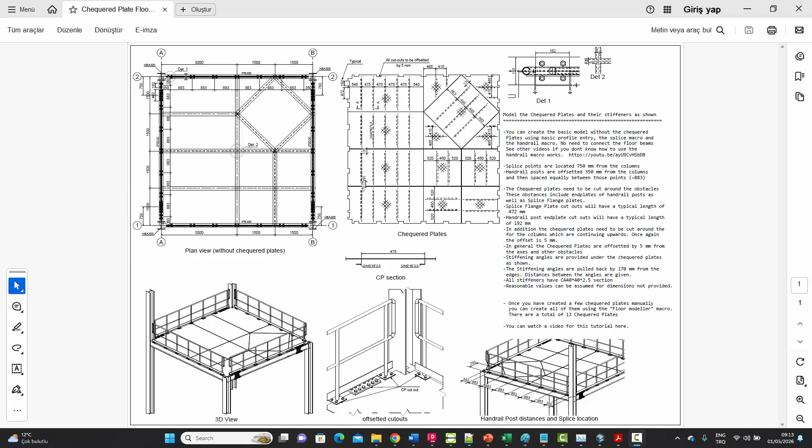So this is the assignment which we will be attempting now. It's basically very small, just 4 columns, a few beams, some handrails around them, and some splice points as well. If I zoom in over there, you can see that there are handrails, and the handrail posts are connected to the floor beams like that.

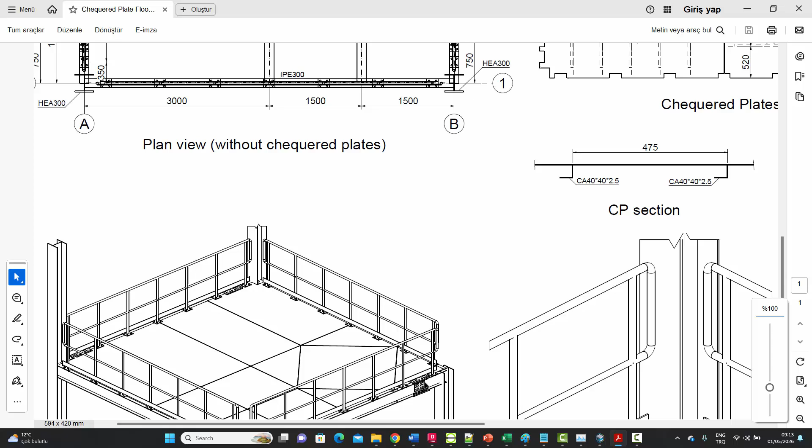And then there are some splice points. So you've got splice points over here in the beams, and over here and over here. So basically on these 2 beams only. The other 2 beams don't have splices. And the assignment is basically about creating these checkered plates in these areas over here, which the floor would need.

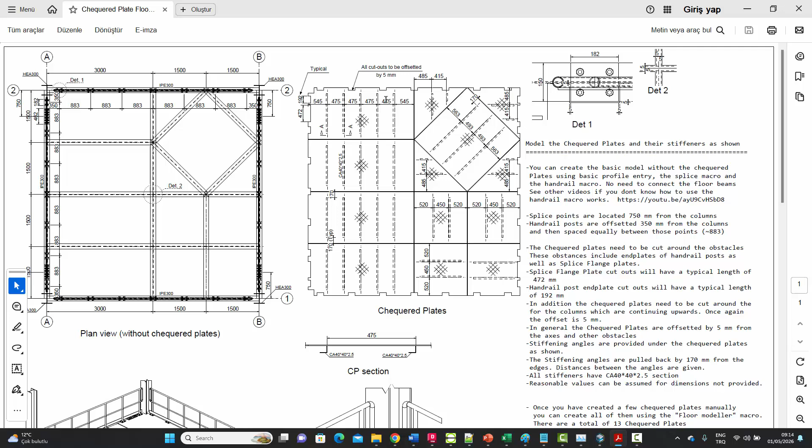So there'll be 13 checkered plates created along with their stiffeners. The checkered plates are very thin, as you know, so they usually need stiffening under them. These stiffeners are given as angles, CA 40 by 40 by 2.5, and we can zoom in over here to see how the angles are welded under the checkered plate at certain distances. Those distances are given over here for each individual.

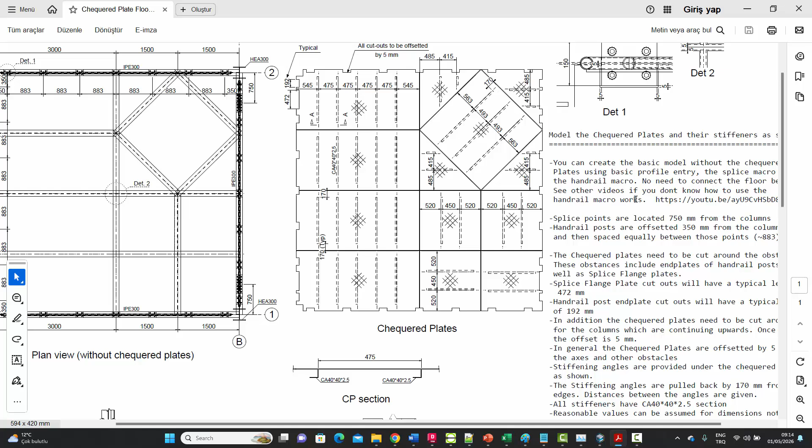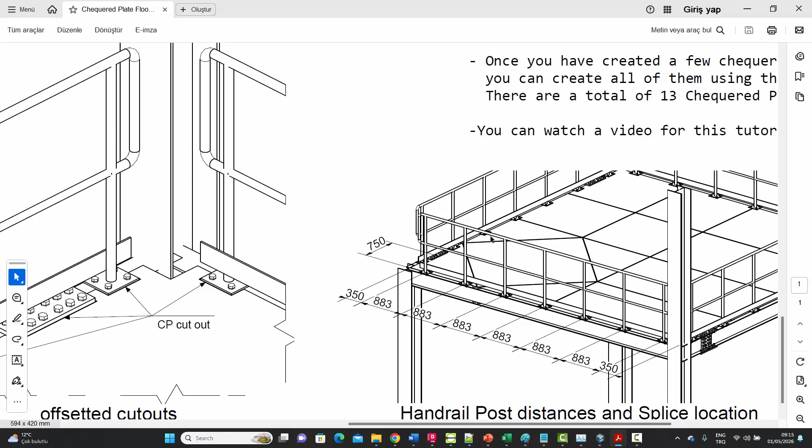Full dimensioning of the checkered plate is not given, but we can see from the notes that the splice points are located 750 millimeters from the columns. The middle of the splice point is 750, and the first and last posts of the handrail are 350 millimeters from the columns, and then they're equally divided into 5 more posts in the middle. So that's the dimensioning of the posts.

The checkered plates need to be cut around the obstacles. These obstacles include end plates of the handrail posts as well as the splice flange plates. As you can see over here, the individual checkered plates have been cut out. This long cut is around the splice, and these shorter cuts are around the handrail posts wherever they come. The tolerance is about 5 millimeters. You need to clear the obstacle by 5 millimeters and go around it.

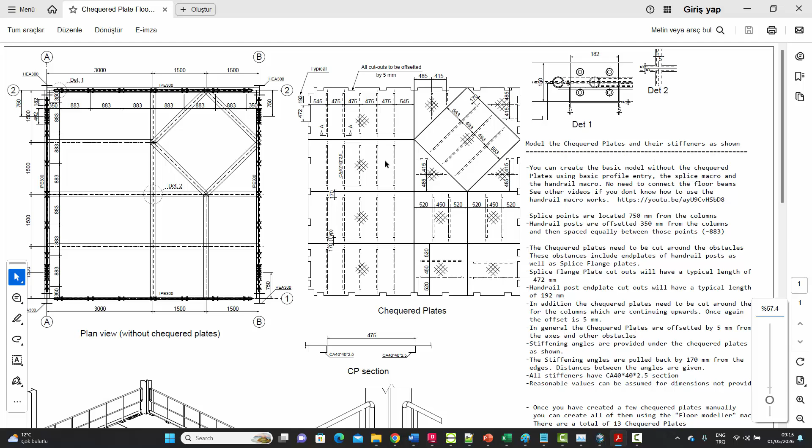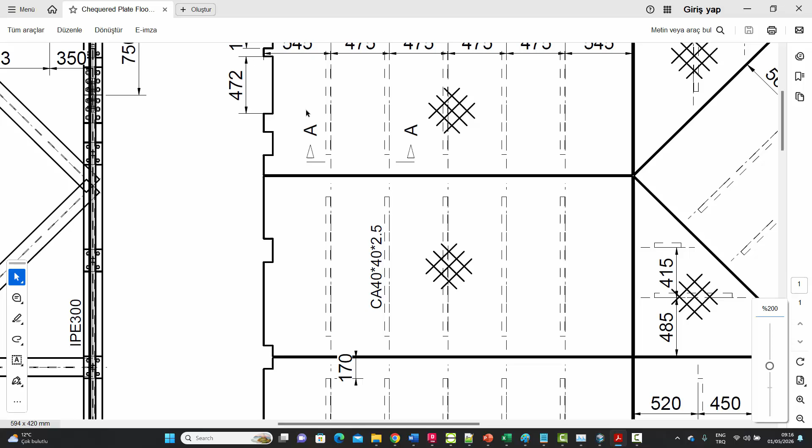They're also cut around the 4 columns. If you notice from the 3D view, these 2 columns end at the floor level, whereas these 2 columns at the back continue for whatever reason. That creates a difference because the checkered plate over here needs to be cut around the column, here and over here. But on the other side, because the columns are not continuing, the checkered plate is just capping the column over here and over here.

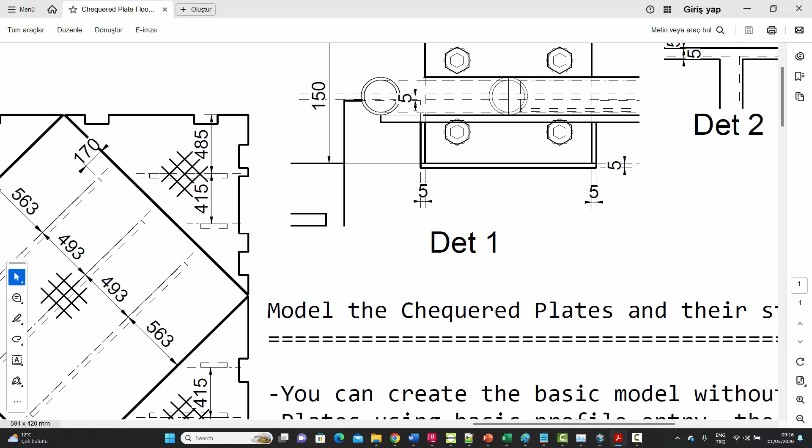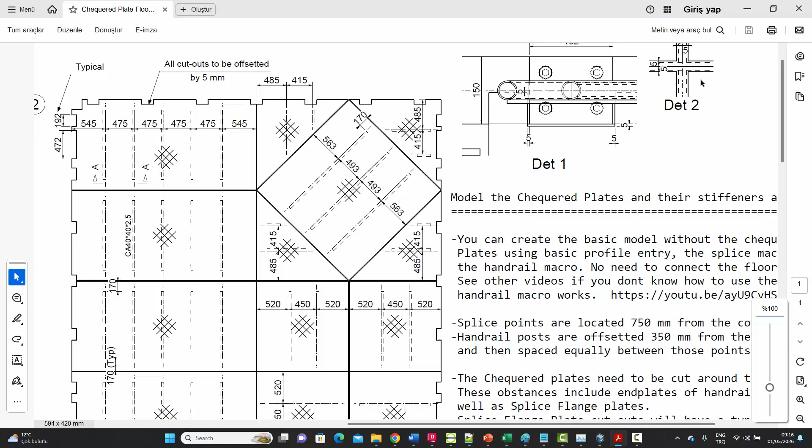If you zoom in over here, we see the 5 millimeter offsets given. These cutouts need to be offset by 5 millimeters. And in areas where the checkered plates are only sitting on top of the beams, they have to be separated from each other as well, like this point and this point. That is also given as detail 2, that the checkered plates are offset 5 millimeters from the axis of the beam, so you have enough space to weld them to the top of the beam.

That's basically the assignment: to create the checkered plates with their stiffeners. But to do this, first you will need to create the columns, the beams, and the handrails in just a few minutes. We won't be explaining the handrail macro here, but we'll quickly use it to create these 4 handrails. Then we'll use the splice macro to create these 4 splices. And then the assignment will be about how to create these checkered plates.

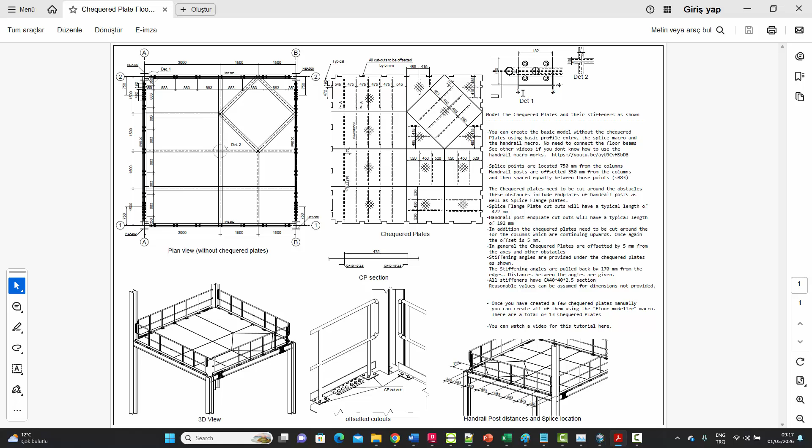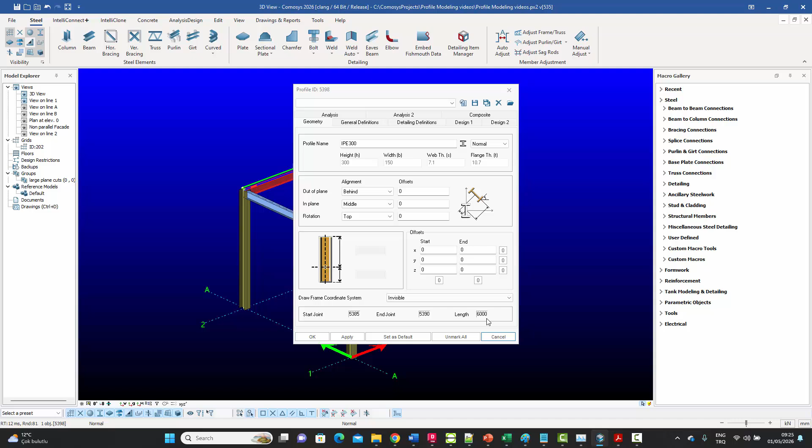So let's begin by entering the structure very quickly. We just need 4 columns in the corners, like that, and right click to finish. We need the beams. The beams can be IPE 300. The columns were HEA 300. Let's just see what the profiles are. So IPE 300, that's fine. These ones are HEA 300.

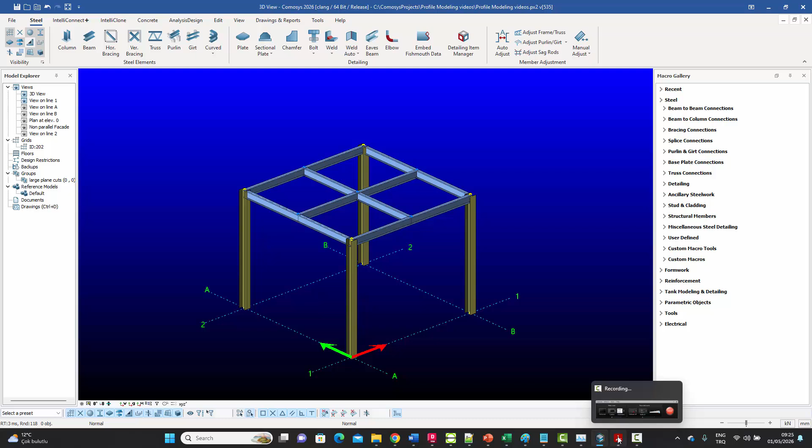Let's go back to the drawing to quickly see. There's a beam in the middle. The middle one is continuous. So along the X direction, this one is continuous, and this one breaks into two. So we go back and create a beam from here to here, then from here to here, and from here to here, and then there's another beam from here to here, and from there to there.

So we just do like that, and there's another one like that. Let's go back to the drawing. This one going over here like that, and then they're basically at 45-degree angles, like that and like that. So that basically finishes off the floor beams for us, and now we can quickly create the splice points and the handrails around it.

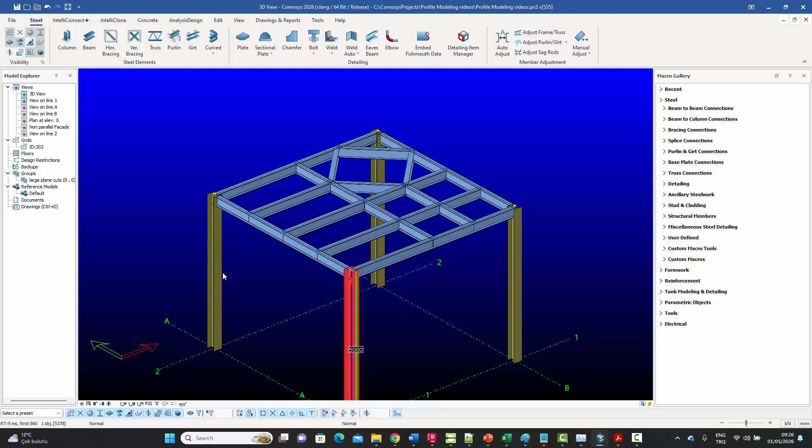But before we do that, let's just extend these columns as well, because these two columns were going to be, just make them 7 meters if you want. The other ones were 5 meters. So yeah, this is what it's supposed to look like.

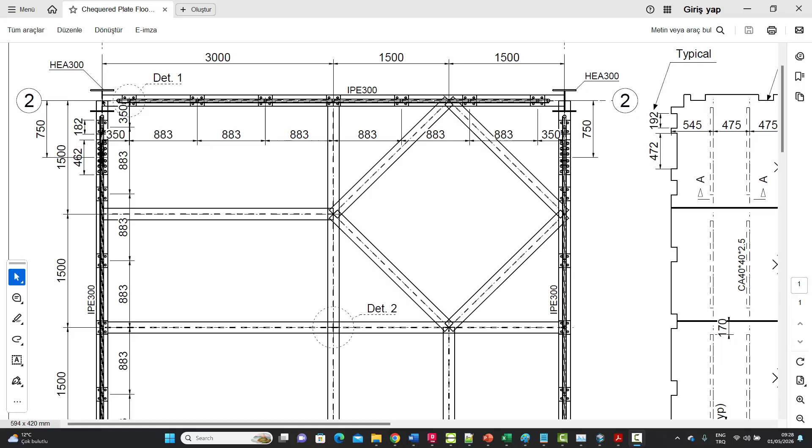So now we see that the splice points on these IPE 300 beams on the left and right are given as at a distance of 750 millimeters from the center of the column. So what we can do is we can select this, go right click and say break frame, and we can hover over this point and say dy minus 750, like that, so that we have a broken frame over there. Then we can select this part and hover over this point now and say dy 750, like that. So we have the two beams broken.

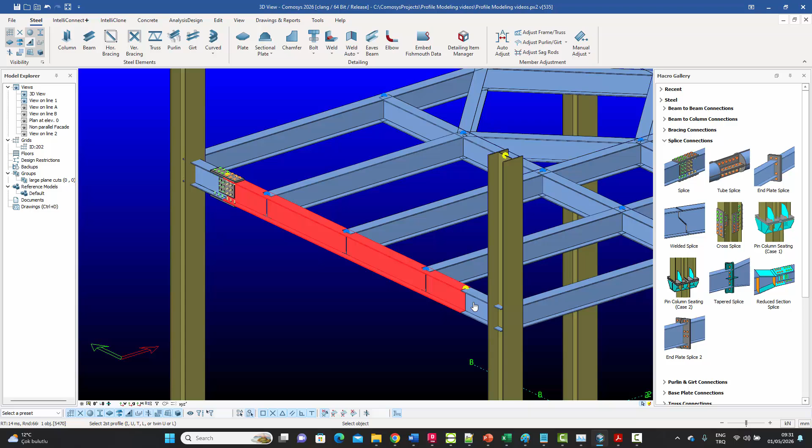We can do the same for this one, hover over this point, say dy 750, and hover over this point and say dy minus 750, like that, so that we have the 4 splice points ready. Now that we have the splice points ready, we can just go to the splice connections over here and very quickly just make those splice connections like that. This is all just preparatory work for the main assignment. So we've got the splices ready now, and now we can move on to quickly create the handrails.

Now, under the ancillary steelwork, we have the handrail macro over here. So let's first quickly use it to create the handrails on all 4 sides, and then we'll modify them according to our requirements. So select that. To make this one, since there are 3 beams over here, because of the splices, we'll select this beam, and then we'll select the middle beam, and we'll select the last part as well. Then we'll right click, and then we'll basically select the start point and make sure the red snap is lighting up so that you have the correct points.

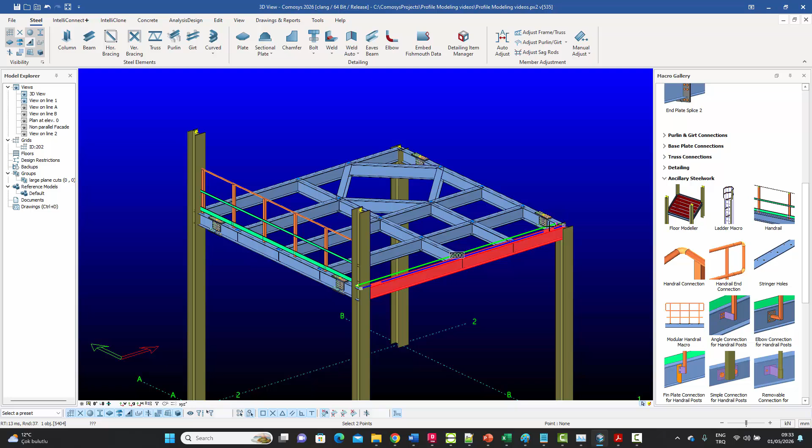Then for this one, you just select this one. There's only 1 beam, right click, make sure the red one is lighting up, make sure the red one is lighting up on the other direction as well. For this one, you will need to select all 3 like that, right click, select that point, and for the last one, once again, right click, make sure you have the red thing snapping like that, and you have the handrails entered.

Now let's just modify one of these. So we select any member of this handrail, press M to select the macro, and press enter to open up the thing. We have this requirement of the first post and the last post as 350. So I'll just enter those. This interpost distance, this is a guideline distance because it's going to try to equally divide. So if I put 1000 over there, it's just going to try to equally divide, and obviously it will be slightly less than 1000. It's probably going to be the same as the other example. This one, it's not really part of the assignment, but to just pull it back a little so that it doesn't hit the column, make it 140.

For the post settings, we'll use the pipe, and we'll bring it to the middle so that it's sitting on top of the beam. That will be one change. For the end plate, because there's going to be an end plate connection at the end of them, I'm just giving these numbers because they're the same as the other example, so that you have the same model. So we have that, and we want the end rail to be, we want these elbows and everything. So we turn on these.

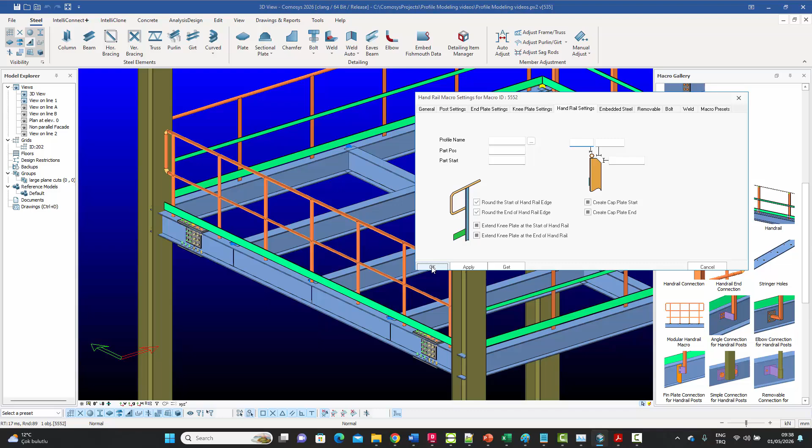This is not a video about how to use the handrail macro. You can see another video on that, but basically just to create something similar. So these settings, the post in the middle, the pipe, the end plate dimensions, and the handrail. So that should basically do it. Let's see. Yeah, so that's basically the kind of handrail I want over there. It's sitting on the middle of the beam. It's spaced by around 883, I think, right now. You can probably see that now.

If you measure the distance from here to here, it's roughly about 800. I'm not snapping to the right point, but it should be the same. Now, once I have that, I can turn on my macro symbols over here. This is my macro which I've modified.

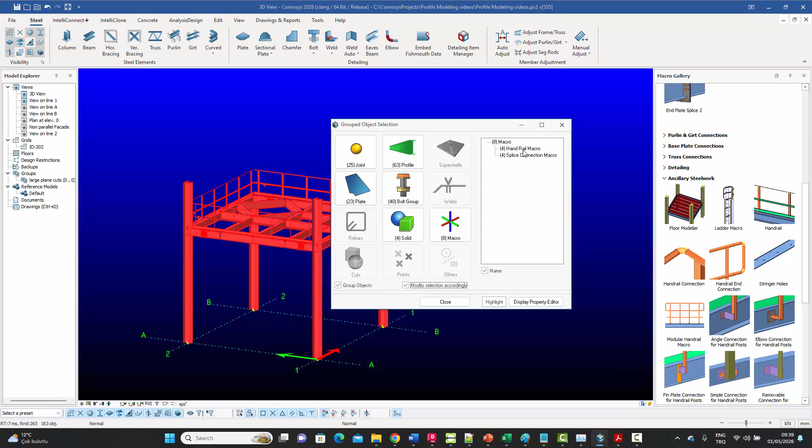What I can do is I can just select like that and go to my macros, and it tells me that you've got 4 handrail macros and 4 splice connections. I want to modify the handrail macros, so I select those 4. Let's turn this off and right click and say match elements to this one, which I just modified, and all the other macros will now be modified accordingly. So I basically just set up the structure the way it was meant to be in the example, and the assignment will start from this point.

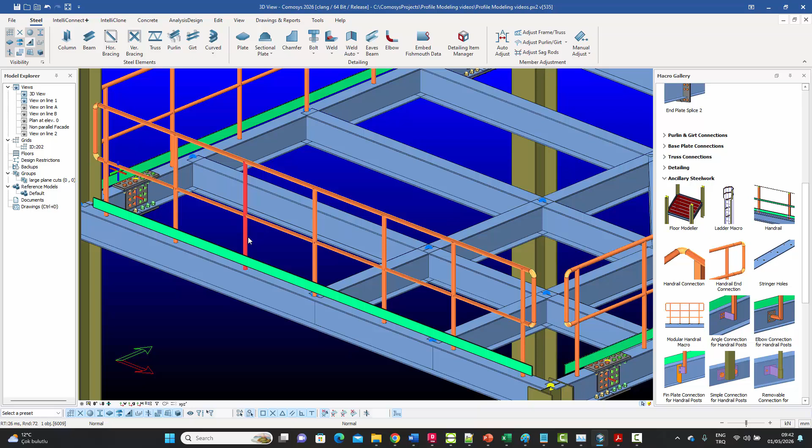Okay, so there's one thing which I forgot to do, and that is I didn't create the end plate connection for the post. So I can just select the post again, press M and enter. And if I go to my post settings, the default is to connect directly welded, and I don't want that. So I'll turn it off. When you turn it off, it goes to the other options. So there you go. Once I turn that off, the actual end plates are also created.

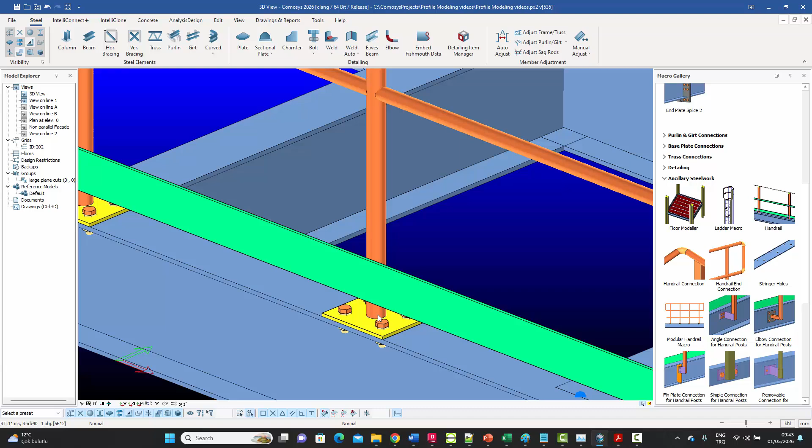And once again, I can select the whole thing, go to macros, select the handrail macros, and make them all match this one. So we have the end plates on all sides.

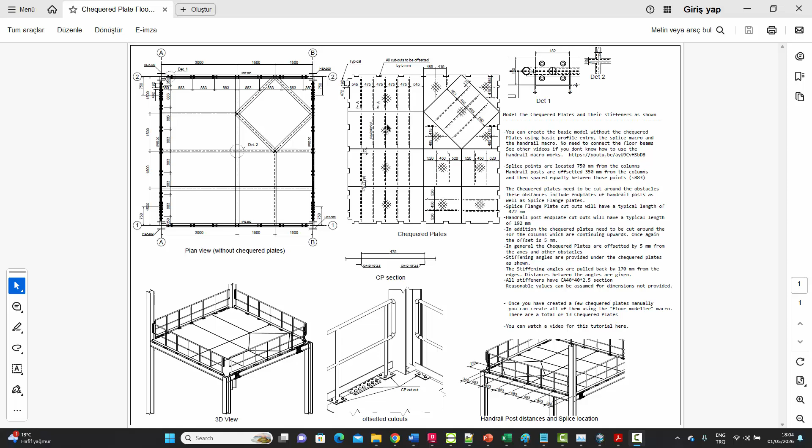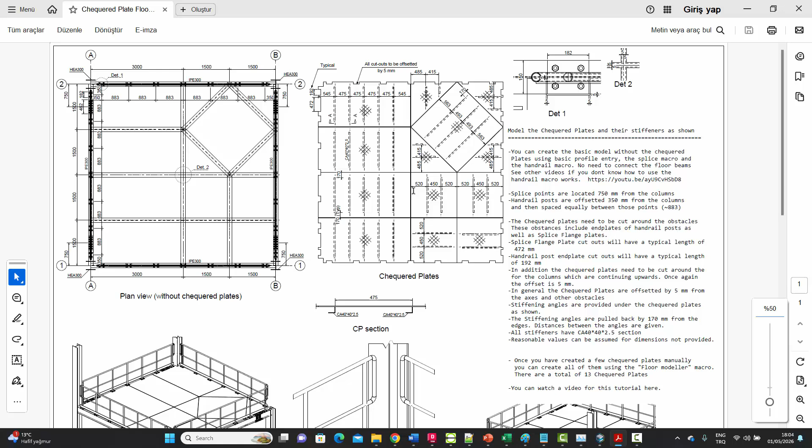Now, the reason why this topic is important is because chequered plates, as you can see over here, if I were to zoom in, are quite involved. All these cutouts will require you to create dozens of points and all the offsetting by 5 millimeters or some number. This would make it really time consuming for the user. And so we need a way to create them with a lot of ease.

So you can see from this picture that it's not easy to make. It's easy as far as the basic process is concerned, but it's time consuming. So let's go back to the model and we'll discuss. There's a concept in Comosys which is called floors. You see on the left hand side, it's called floors, and this is used primarily for entering loads in the building. So what the floor will do is it will automatically find.

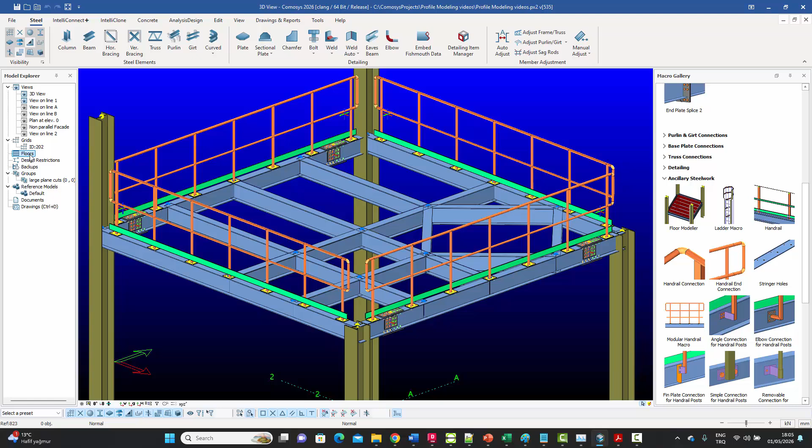So let me go back to the drawing. If you remember, there were 13 checkered plates. There was this one, this one, 1, 2, 3, 4, 5, 6, 7, 8, 9, 10, 11, 12, 13. And if you notice, all of them are the areas between the beams, right? Let's go to the model.

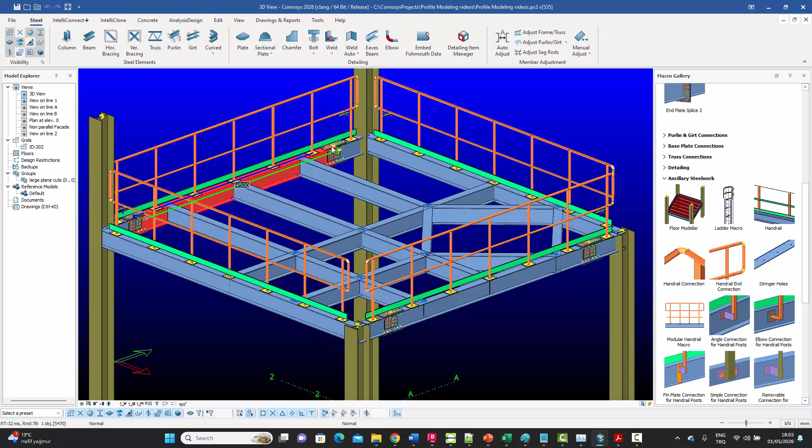See, this one lies between this beam and that beam and that beam, because they have a splice point over there, and that one. So 1, 2, 3, 4, 5 beams provide the circumference for this checkered plate. Similarly, for this one, it's the one I've selected, this one and this one. These 3 provide the circumference for that checkered plate. Basically, the beams and the connectivity between the beams will provide information on that.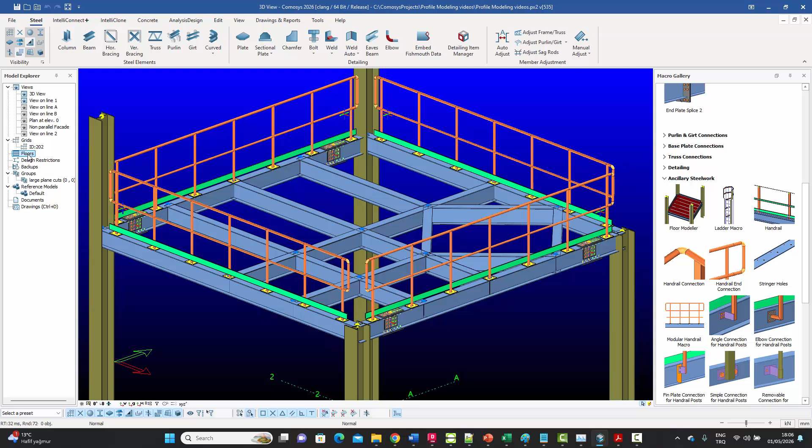And the same connectivity is used for applying loads to the floor. For that we have this concept of floors in COMOSYS. But we use the same concept to create the checkered plates as well, or the gratings for that matter. So how does it work?

You come to the floors, right click and say create floor. When you do that, it asks for a name, and since this is level 5000, you can give it a name of plus 5000 level, any name. Basically, this is just a name. Once you do that, under the floor you get this new floor. Right now, there's nothing in it.

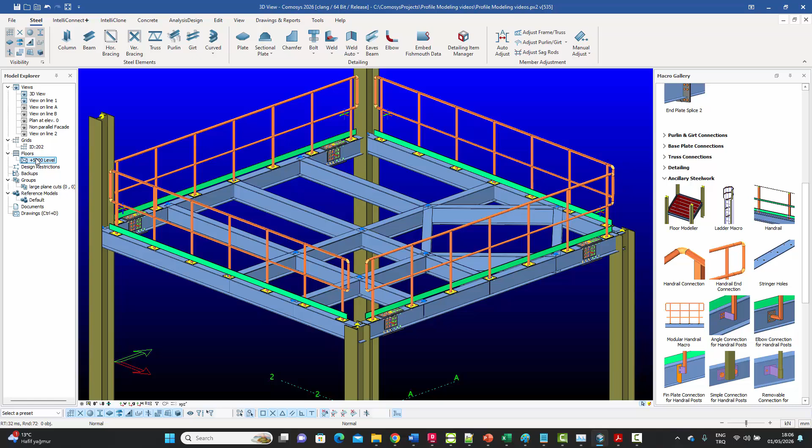It's just a name. What you can do is select it, right click and say find polygons. What that means is it will look at some level, which it's going to ask for in a second, and it's going to try and find all these 13 areas where theoretically loads can be applied on the structure. But we'll use the same concept for checkered plates as well. So it says you want to find the polygons of plus 5000 level.

This name doesn't mean anything, it could be any name. When I say yes, it's going to ask for a Z level. Since we're working in this view, this Z level will be in reference to the coordinate system of that view. Since that view is at the 0 level, I'm going to say 5000 from that level.

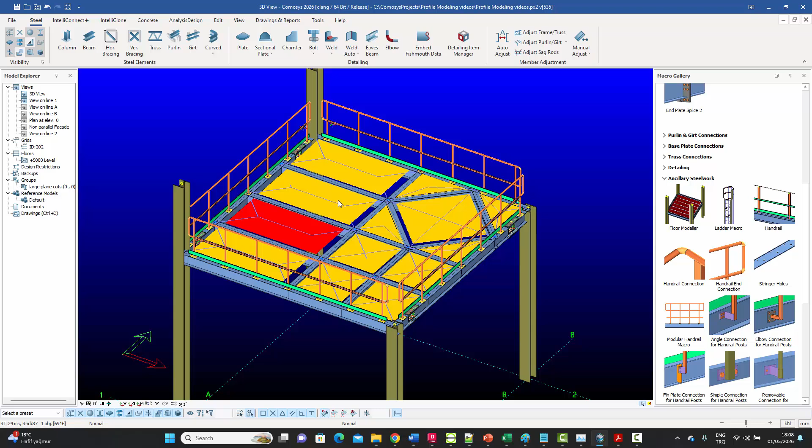When I do that, you see immediately it creates certain polygons. These are not checkered plates, these are just polygons which you can now use because COMOSYS is also a software for doing analysis and design. I can actually create load cases and use these polygons to create loads on beams, like this one can create loads on this beam, this beam, and so on, basically the ones surrounding this polygon. So the primary purpose of these yellow or orangish polygons is to create loads.

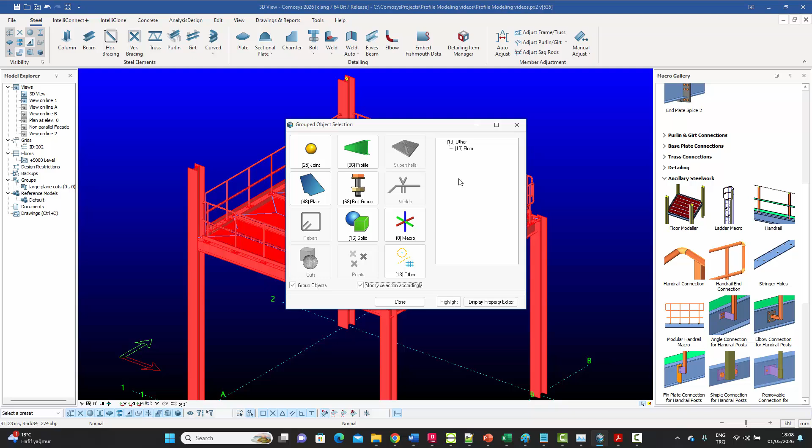But we can also use them to create checkered plates. How you do that is you just select the whole thing, or basically you only need to select the polygons. If you come over here under the other section, you will see floor, and when I do that, only those polygons will be selected. If you notice, their count is 13.

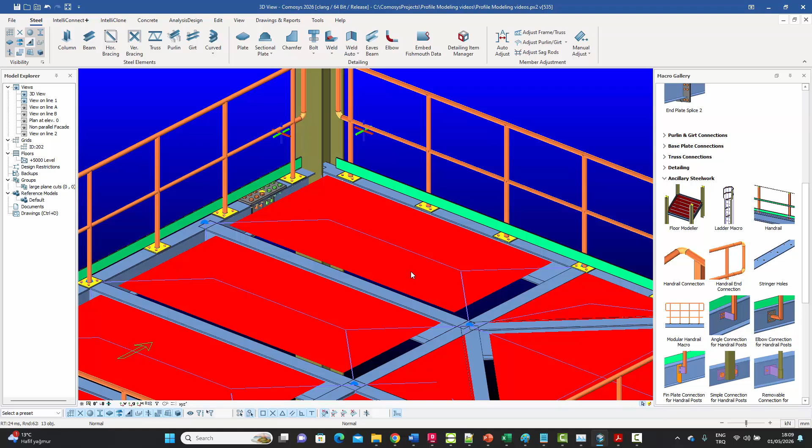They're basically the same shapes as the checkered plates, the only difference being they do not have any of the cutouts. They just have information about the beam connectivity, how the beams are connected around those, but they have no information about the plates, the splice plates, the post end connections and all that.

But when I select these polygons and come to the ancillary steelwork on the right hand side, once the polygons are selected, all I need to do is just click on it. There are certain defaults - if you want, you can first click shift and open it to make some changes to the settings, or you can just click on it with the default settings. I'm going to just click on it now, like that.

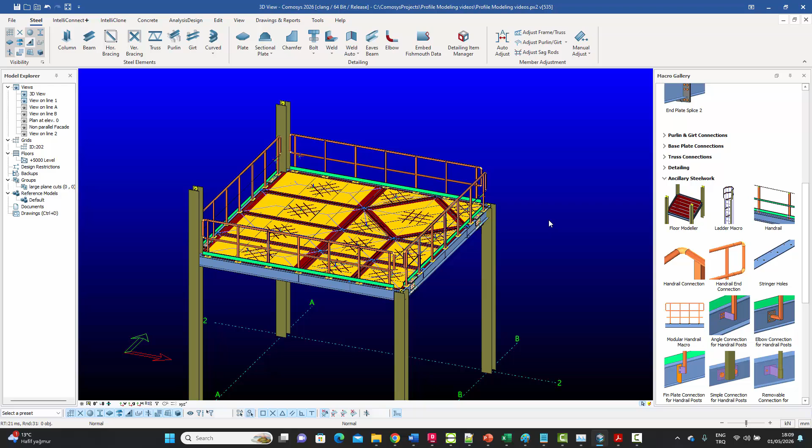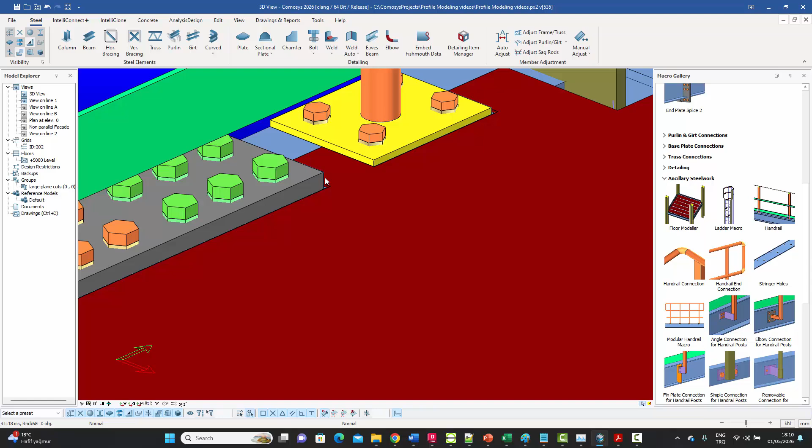And when I click on it, you see that it has done something - it has actually created my checkered plates. You can see they have been cut out with certain offsets around those obstacles, around the flange plates of the splice connection, once again around that. And there are 13 of those.

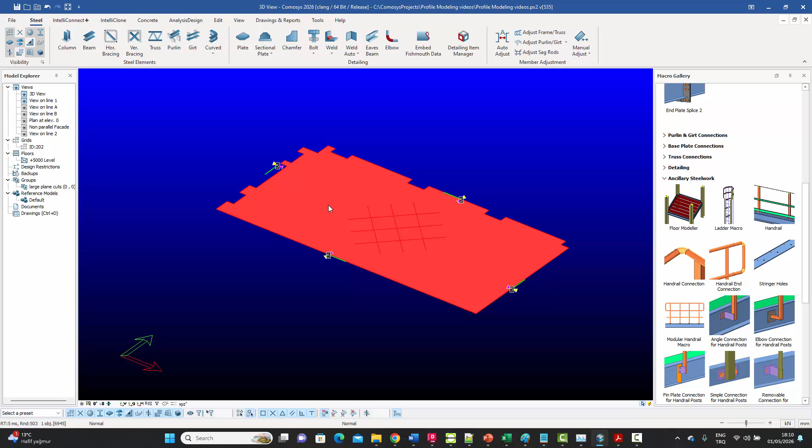Just to make it clear, let me turn off the visibility of the polygons now because their work is done. So let me go in there and turn off the visibility of the polygons like that, so I can see them clearly. If you notice, basically this assignment is over. Every one of those checkered plates is now ready, and we can actually just do numbering and create the drawings if you wanted to.

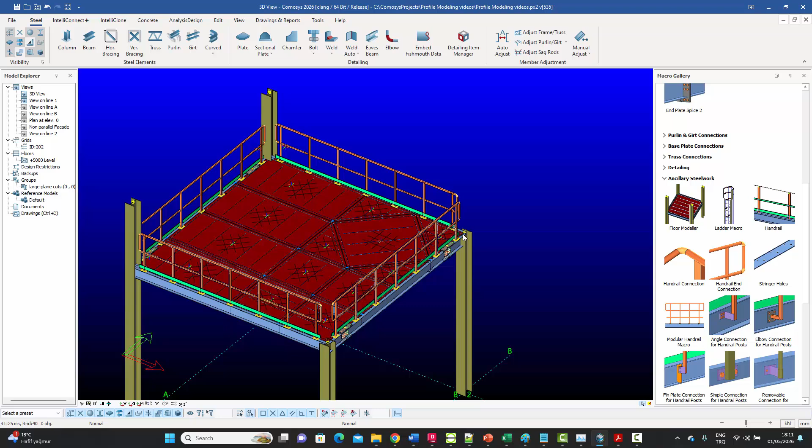Let's look at this one - show only. You can see this, and you can also see that it has cut out around the column as well, and it has also realized that this column is not continuing, so there's no need to cut this one out, so it's just left it like that. Just look at it from the top.

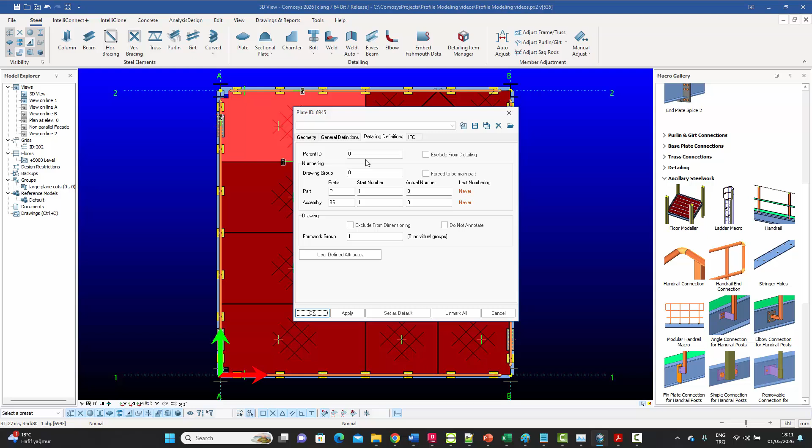Let's see what kind of usage it has. Let's see where we can find the usage - checkered plate over here, so these plates have been given a usage. If I turn on, press Alt D, you will see that it has also provided the stiffeners under them.

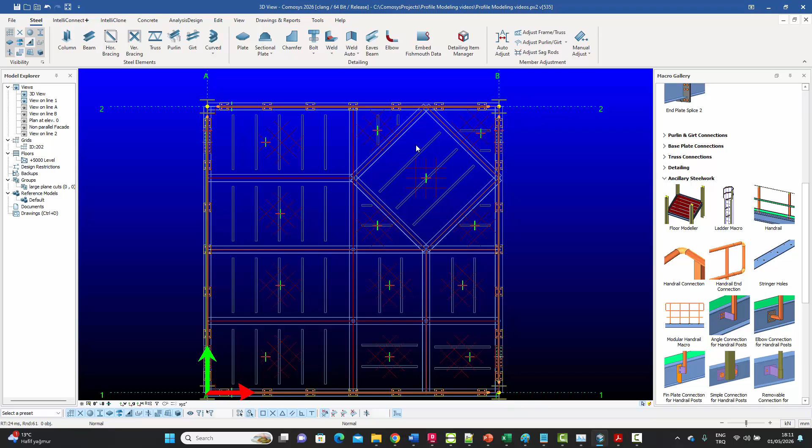And of course, there are settings for each one of these. If we go inside and double click on any one of these macros, you can control what kind of stiffener you want, whether an angle profile or a plate. You can put in the distance between the stiffeners if you want. You can actually make it design those, a kind of rough design, by giving the area load on that checkered plate, a uniform load if you will. Of course, you need to check it more with a proper design, but this will give you a preliminary kind of design.

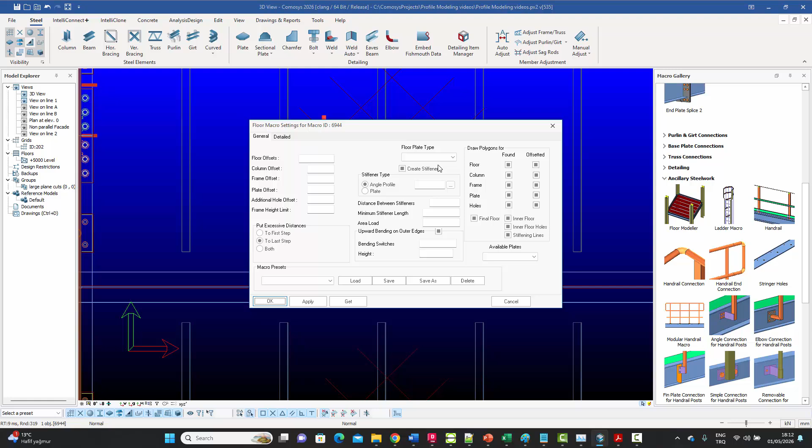You can give those offsets of 5 millimeters, which are mentioned in the assignment, the plate offsets, the frame offsets around the column, the floor offsets, column offsets separately. The floor offsets would be in between the checkered plates, between the beams over there.

So all that, if you notice, it's created 1, 2, 3, 4, 5. It's actually created 13 macros, one each for each checkered plate. If I were to select like that, press enter and click on the macros, you now have 13 floor macros as well.

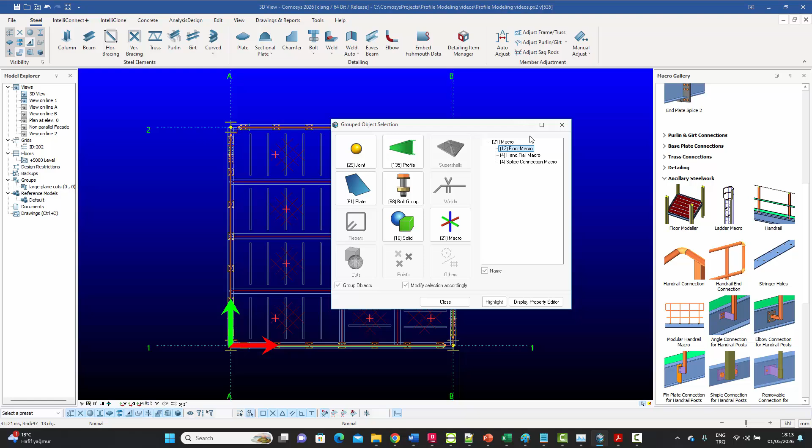You had 4 handrail macros to begin with, 4 splice, and we've got 13 floor macros. I can easily select those, and I can click on enter. And from here, I can do multiple modification if I wanted to.

But my job with this assignment is primarily done. If you open the drawing, you will see that all these checkered plates, which were in the drawing, have been created automatically by using this concept of floors.

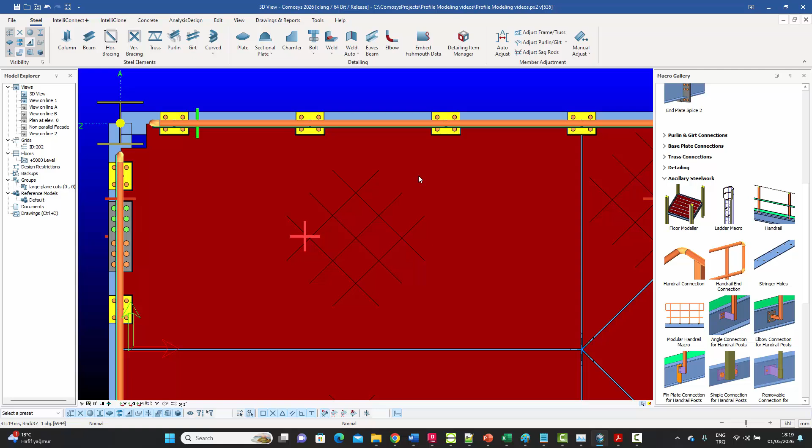Now let's give a little bit of extra information about the inside workings of this macro. So let's just select one of these checkered plates, click on M, which will select the macro symbol, enter, open it. And you see that there are certain parameters over here.

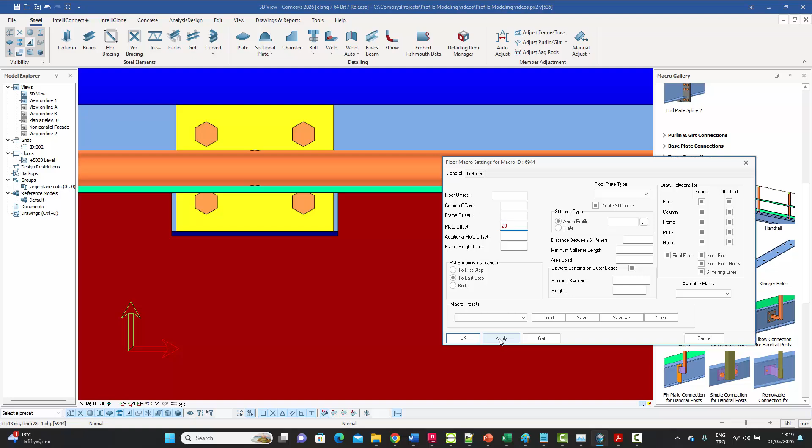Let's zoom in over here. So this one, which says the plate offset, is basically right now the default is 5, I think. But if I made it 20, for example, if I said apply, you'll see that around all the plates, wherever it finds plates along the beams, which act as obstacles, it will offset them by this number. So that's basically the job of this offset, the plate offset.

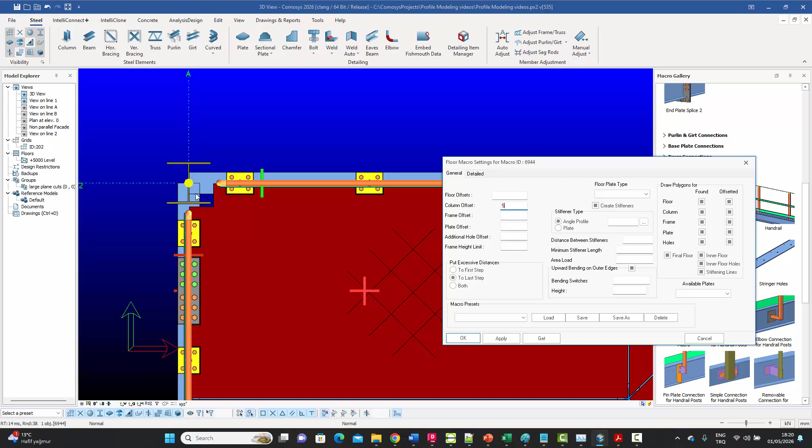The second offset, which is useful, let's bring it back to 5. The second offset, which is useful, is the column offset. So if I put this one to be, the default is 20 in this case. If I put this to be 5, then if I say apply, around the column, the cutout becomes 5 millimeters offsetted. So that's the column offset. Whatever the size of the column is, depending on that, it will be used.

And related to that is this frame height limit, which is basically a limit for the column size. So the default is 300. What it's saying is that if the column size is less than or equal to 300, then you just cut it like this. So if you notice, there's a little hole left over here from which something can fall down.

That would depend on from case to case. But if you wanted to actually go around this, you could reduce the frame height limit to 200, for example, because this column is 300. And if I do that, then it's going to do a cut right around the column like that. So the shape of the checkered plate would change.

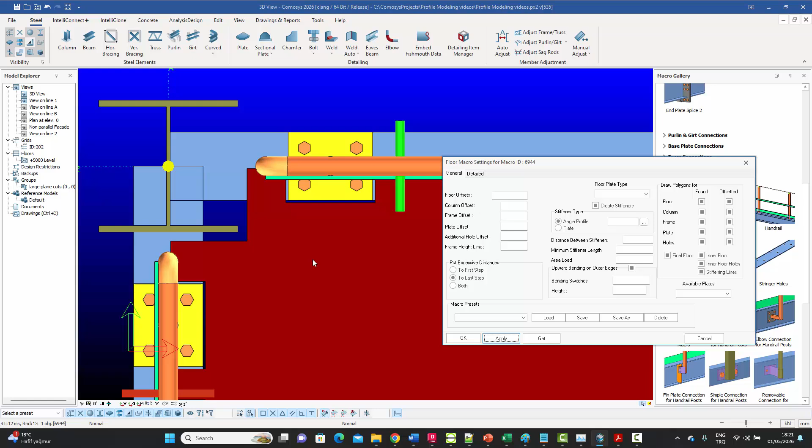Let's pull this back as well. The floor offsets, let's put it back like that. The floor offsets would be the offsets between checkered plates around the axes where two checkered plates are lying on top of a beam. If I put this one to be 22 millimeters, let's say, then this one will open between that one.

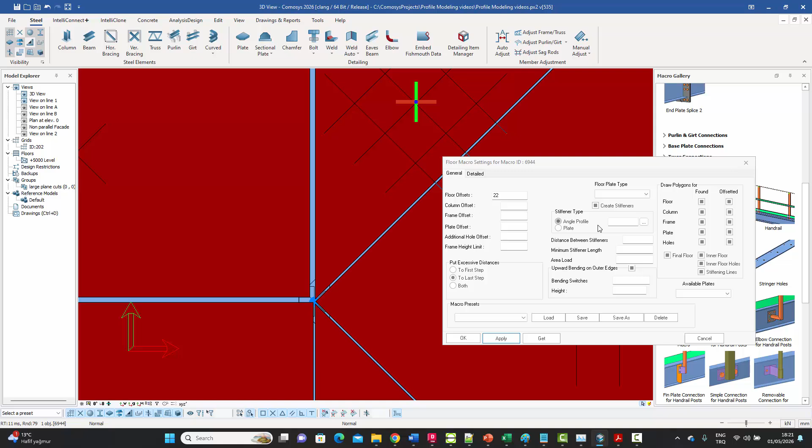Obviously, I'm only applying it to this macro now, so it's only in one direction. The total being 22, half of that would be 11. That would probably make the change like that. So there's one, that's the one we can use. The column offset, the frame offset. Frame would be if there were frames coming out of here.

Let me talk about, so over here you see whether the stiffeners you want under it are angles or plates. If you want, you can convert them to plates, and then there will be other information on the other tab. But over here you also have the distance between the stiffeners. So you can enter some distance between them.

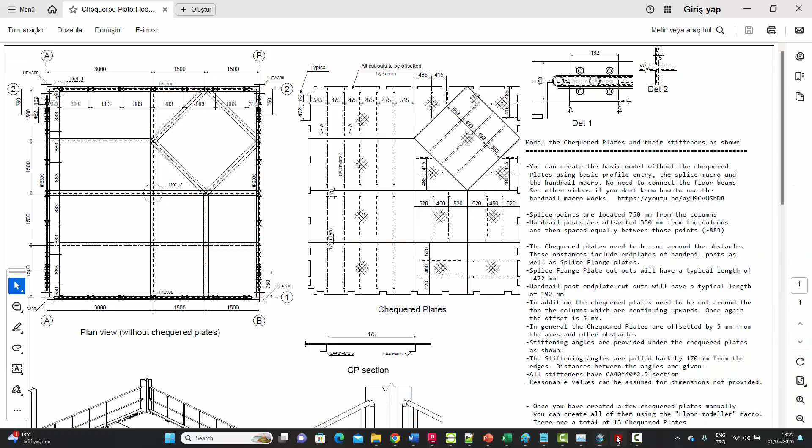This is also part of our input, if you remember. We have inputted the distances between the stiffeners like that. So those can be inputted from that setting over there. And there's something called bending switches. Now, what are these bending switches?

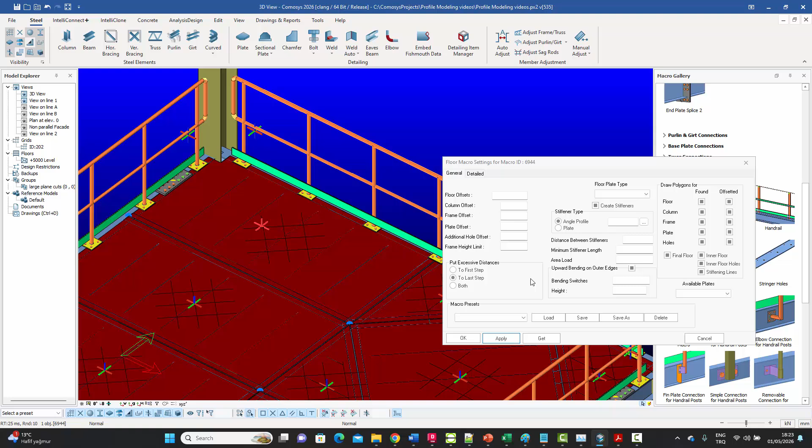The bending switches, basically a bending switch of 0 means no bending, and a bending switch of 1 means bend. So this is a rectangular plate with lots of cutouts, but primarily it's a rectangular plate. So there are 4 sides primarily, and all sides have the cutouts. But since there are 4 sides, saying 0 means don't bend, and saying 1 means bend.

So usually it's a bit of a hit and miss, trial and error, but you can find them quickly. So if I was to just say 1 and then 0, it would mean bend the first edge, and then for the remaining, just 0 means, actually I could have said 0, 0, 0.

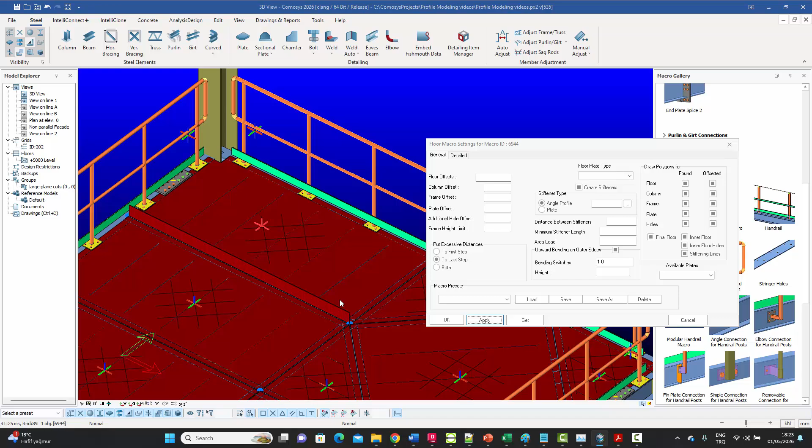That's the same as saying bend the first edge and leave the remaining 3 edges unbent. But this is the same as entering it like this, so the last digit is used for the remaining edges. So 1,0 would mean bend the first edge. If I apply that, you see this is the first edge, and it basically creates a bend for that edge.

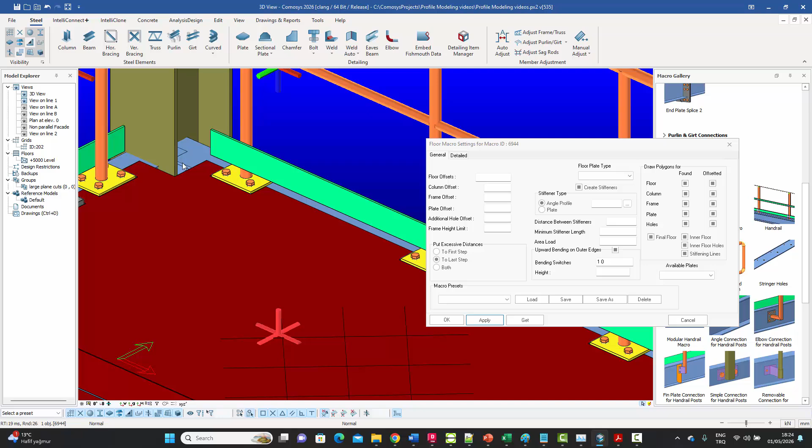Sometimes when you're pouring concrete or for some other reason, you want these edges to be bent as well, so things don't fall off. For example, you want this opening to be closed. So when you put 1,0, the first edge will be bent. If you want to know whether this one is the second one, you'd say 1,1 and 0, so you know which one is the second. If you wanted the first 2 left untouched, you'd say 0,0 and then 1, so you know this is the third one, and then 0 for the last one. Or maybe you'd say 0 and 1, so those 2 edges of the building get bent.

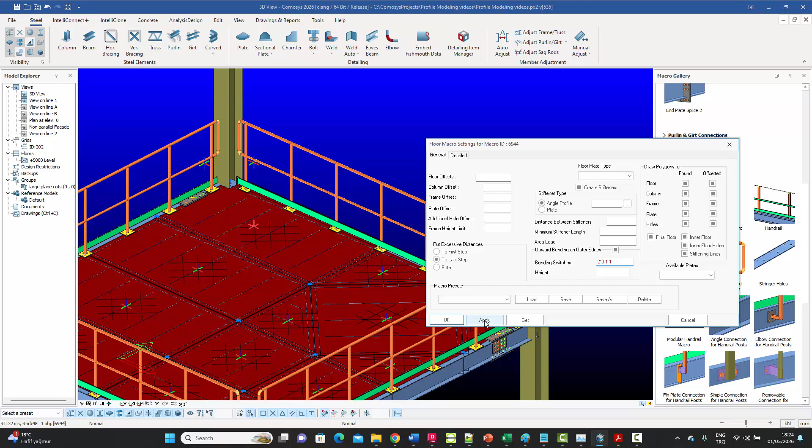Let's zoom in and see. It'll once again go around those obstacles like that, as you can see. Very convenient, very easy to use. Let's go back in. You can turn off these switches and it'll come back to the normal state.

On the other side, on this detail tab, you can put in the stiffener depths if you're using a plate. You can give the offsets between the stiffeners, and give the stiffeners a thickness. If you're using the angle, then it's the angle profile, but if you're using plates, you can give them the stiffener thicknesses, the welding material, etc. There's obviously a weld between the angles and the checkered plate, so you can provide that information on that weld as well.

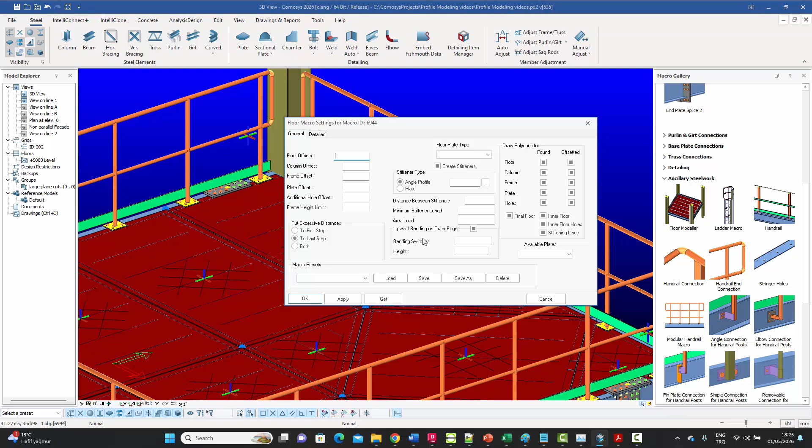So using this floor-based macro, the way it works is you first create the floors, select the floors, and just click on this. When you do that, it basically creates those checkered plates with a single click.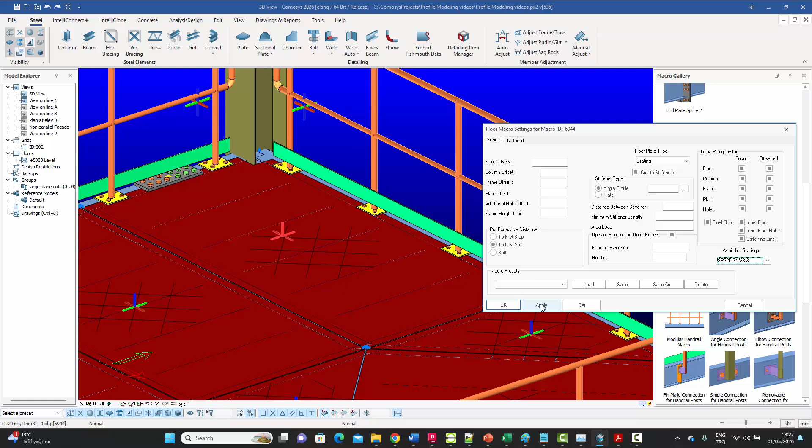Now, one final piece of information about this macro - let's select it, press M and enter - is that using the same macro with which we created checkered plates using the floors, we can go over here to the floor plate type and choose, instead of checkered plates, grating. When we choose grating, you can choose the type of grating. This is linked to a file where you can input all your gratings, and you can also link the checkered plates to a file. If I select the grating and say apply, then instead of the checkered plates, the same command can produce a grating. This time the symbol also changes, and it's doing the cutouts around those plates as well.

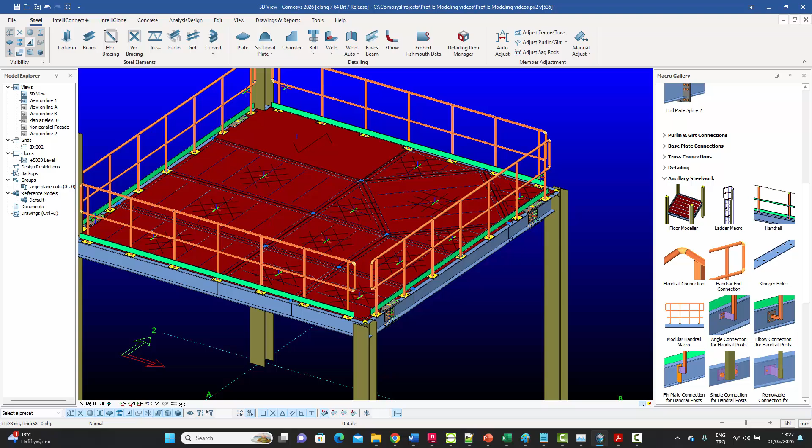You just select the grating type, and suddenly you have 12 checkered plates, and this one is a grating. Obviously you're not going to do it in real life like that, but the point is the same command allows a multiple selection - if I select all of them, go to the macros, go to my floor macro, and say make them all gratings, I could just say match elements to this one, and all of them would be converted to gratings.

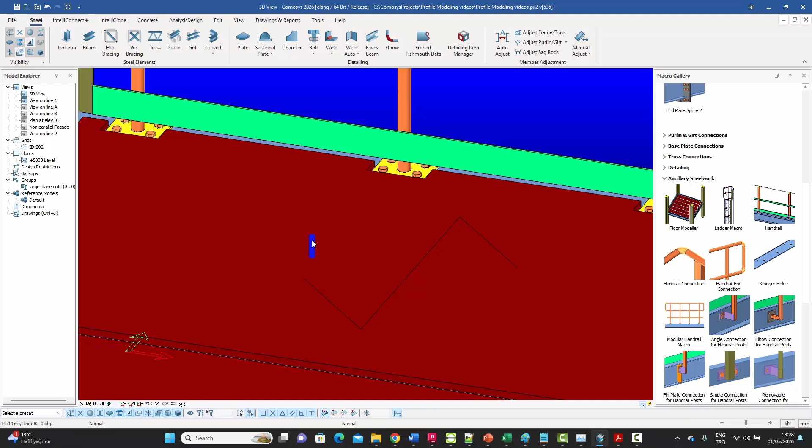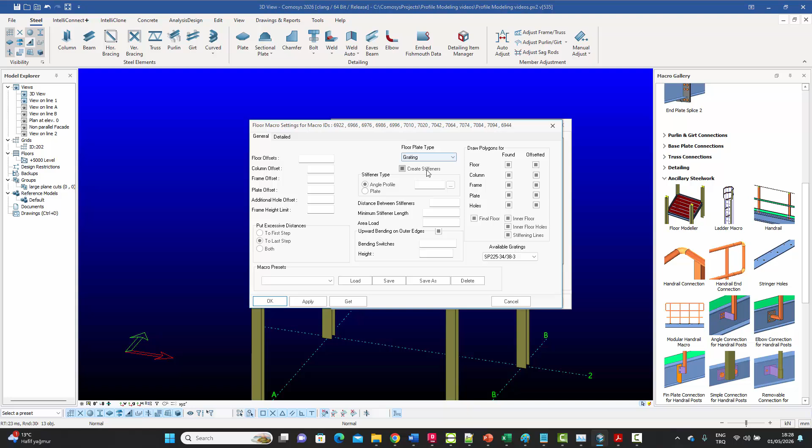Now I think I didn't select them - hold on. So if I go and select them again, let me do a multiple selection over here. Maybe the match elements isn't implemented for this. If I just double click on this one, for example, yeah, that's like that. And if I convert these to grating from here and say okay, close and close - yeah, all of them are now turned into gratings. There we go.

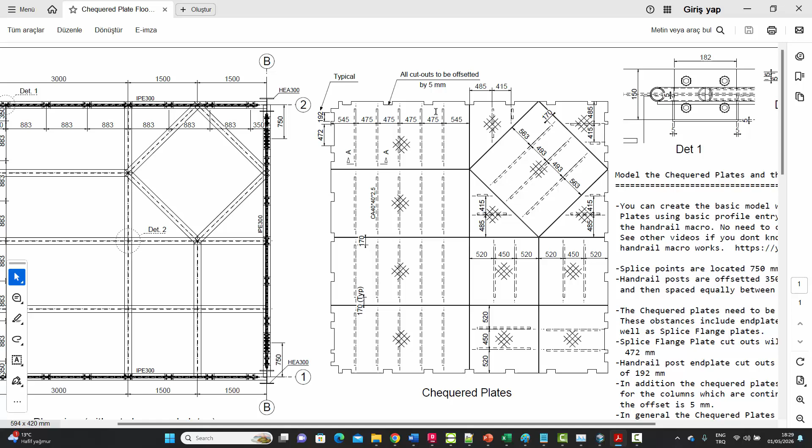So a very quick and very easy way. Otherwise, normally, just imagine if you were going to enter all these offsets, 5 millimeters on every side, create all those points or use DX DY - it would be pretty time consuming, and then the stiffeners under them. So with a single click, we've managed to finish off this assignment.